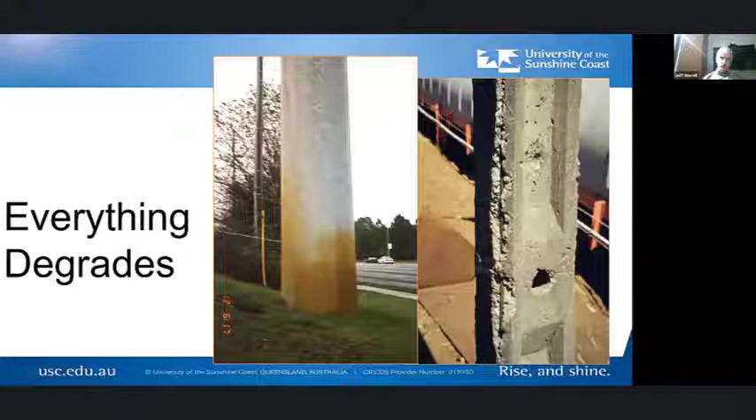Our partners at the center, first off, Forest and Wood Products Australia is our funding body. They've decided this is a valuable exercise for the country, and they've invested heavily in our center. Our other two partners are the University of Queensland and the Queensland Department of Ag and Fisheries. So there are two primary partners. We have a number of other research partners we're working with. University of Tasmania in Launceston and then University of South Australia at Mount Gambier are two of the other groups we're working with. And we really are looking to reach across the country to work with lots of groups because we have capacity here in durability, but lots of other people have other skills that we can marry in and take advantage of. So we are looking to reach out to others.

So our center has a number of objectives, but I'm only going to talk about a few of them here. One is that we need to develop... there's lots of materials coming along, lots of new, exciting wood-based materials, composites, modified woods, all kinds of things that are coming into the country.

And while they've been looked at elsewhere, they aren't necessarily fit for purpose for Australia. And one of the things we want to confirm is that these materials will perform as expected here. So we're trying to develop data on emerging wood-based materials.

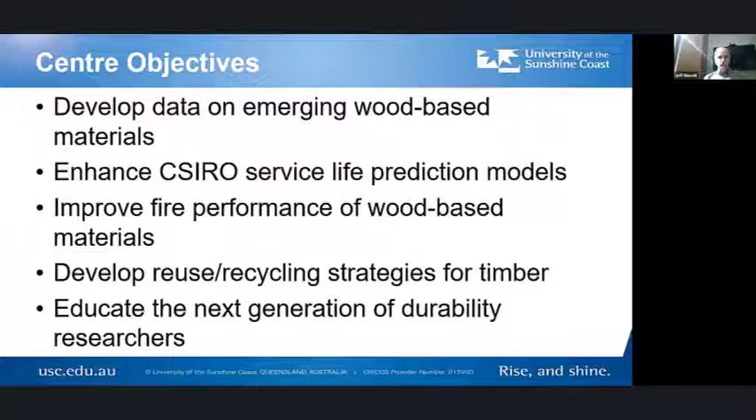We are also looking at the circular economy and reuse recycling strategies for timber. That's going to be increasingly important, not only for timber, but for everything. But underlying all that is to educate the next generation of durability researchers so that we don't have this loss of capacity in the country. So that's one of our underlying assets, is develop people who understand timber and understand durability. So we're doing a number of smaller projects that all fit in under this.

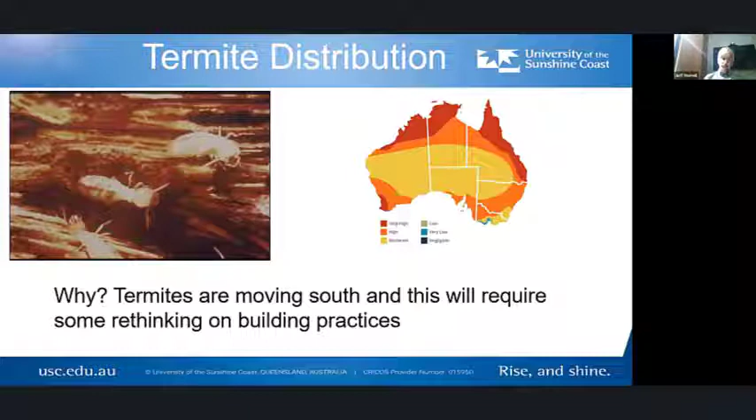We're seeing changes in distribution of termites. Many are moving further south as a result of climate change, and we expect to see changes in how we need to build for some of the termite species. So we're working with a group in Victoria that has an app which the pesties can use to report termite distribution, and we're working with them to reassemble a better map that's probably a little more refined than what you see on this fairly broad scale. When we get that out, that's probably going to require some rethinking on building practices across the country, but particularly further south, say in Victoria.

At the same time, we're also asking, okay, what new materials are coming? What do we need to know about them? Will they perform as expected? There are a lot of materials coming in from offshore, things like acetylated wood, thermally modified timbers, newer composite materials. And there are lots of claims about how they perform. Many of them come from Europe, where there are not termite hazards and where they do not have tropical and subtropical exposures. So we need to make sure that they are really going to perform under the expectations here. So we need performance data for Australia.

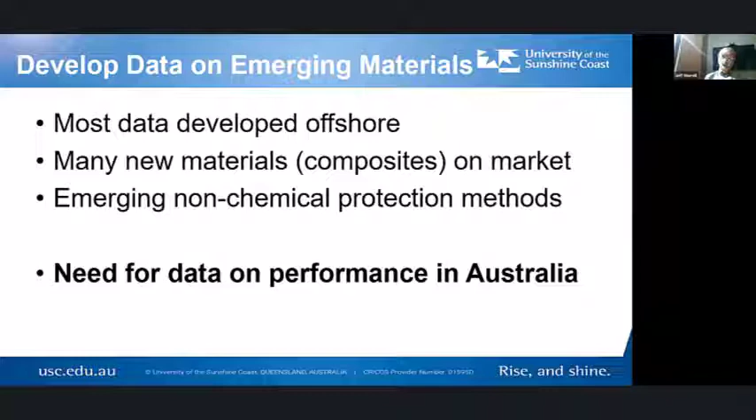And we have been working on an exceedingly large scale test. There's about 8,000 pieces of timber in it, to look at some of these newer materials and newer chemistries where there are not public data, and to try and develop the data to show whether they will perform as expected or not. This is in cooperation with our DAF partners, the Queensland folks. This is just examples of some of the tests we have going.

We have sites in Maroochy, north of Brisbane, and then way up in far north Queensland in Innisfail, where the conditions are quite extreme. And the goal here really is to develop the data that shows whether these things perform, so that when somebody walks into an architect or an engineer's office and says, I have the greatest thing since sliced bread, they have data to really decide whether that's true or not. So that's a big part of the test here.

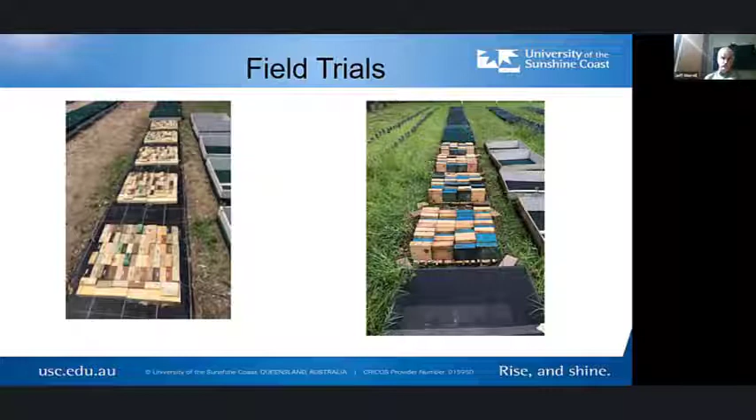At the same time, this test is going to inform a lot of the predictions that people are making about performance of treated timber. So it's got a dual purpose, and there's some other basic research we're doing around it, like what organisms are attacking the wood, where do they attack differently in different places. So there's a lot of other more basic scientific work that's involving a number of postgraduate students.

One of the troubles with doing tests like this is the center is operating on a 5-year cycle. Decay doesn't really operate on a cycle. It operates on its own time frame. So this is a relatively slow process, so it's going to take time. But why is it important? Well, it's going to help people decide what materials are appropriate, and hopefully in the end reduce wood losses, so that we wind up with materials that perform as expected or better, and help people to use the resource more effectively. And we want to do that with all materials, but particularly with timber.

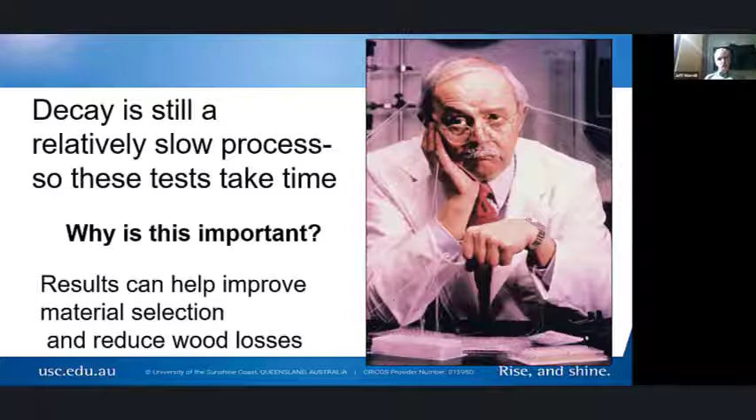Those data will feed into the service life prediction models. And let me give you some background about why that's important. Lots of engineering materials claim service life values, 50, 60, 1,000 years, doesn't matter what you say. But there were a series of models developed by the CSIRO in the late 1990s, early 2000s, to predict the performance of timber in different applications. And they were quite world leading.

In fact, Dr. Bob Leicester from CSIRO won the Wallenberg Prize, which is sort of like the Nobel Prize of timber, for the fact that it was so world leading. Well, it's been a long time since those models were developed, and admittedly, at the start, the models were thin on data. And one of the things we're trying to use the field trials for is to help produce some of these data that will help improve the models.

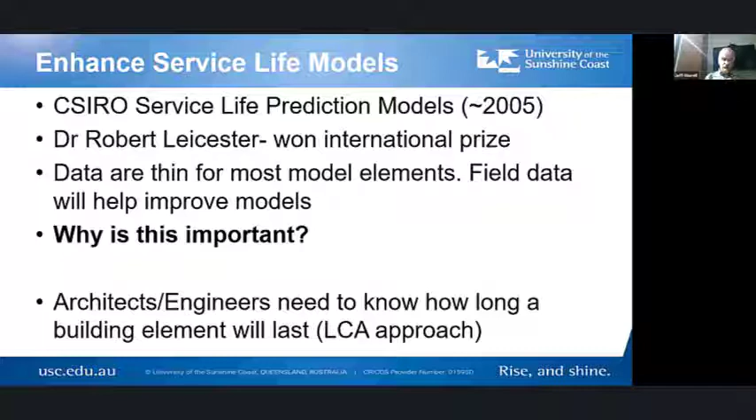If we can do that, these models become a lot more useful in predicting where you should use timber most appropriately. And if we do it right, then people have a better feel for what to expect of the different materials that are out there. So it has a short-term implication for, okay, here's how these materials that are coming on the marketplace will perform. In the long term, it says, all right, if you use this, you can expect 25, 50, however many years for this given material. And that's one of our big goals, is to give people a little more certainty around timber.

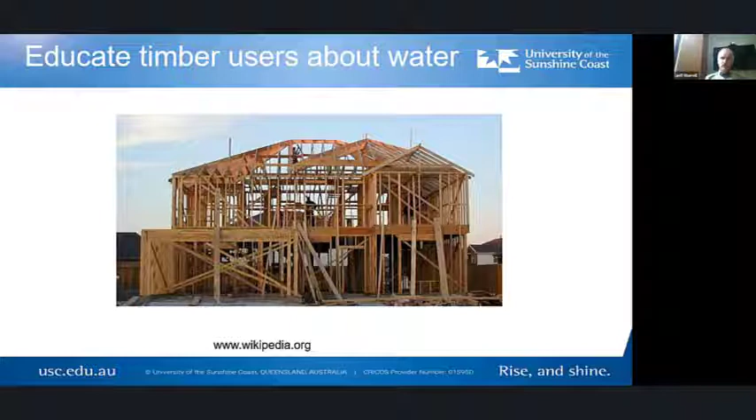One of the things we're keenly interested in is what's going to happen when you get wet on a structure like this. Mass timber has come along, so here we have cross-laminated timber that's used in the 25 King Street building, but there's also lots of other products, mass plywood, gang nailed, laminated timbers. There's all kinds of materials that are larger timbers that will also wet on site. And one of the things we're keenly interested in and are working with our DAF partners on is, how do you manage that? How much water gets in? What are the implications of that water? And this work is just ongoing. So we're hoping to come out, in probably the next year or so, with sort of recommendations.

A lot of companies are already dealing with this. They're going to just-in-time delivery on site, covering materials and putting water barriers on beams as they're being put in, because they recognize the risk of these materials getting wet. They wet just as quickly, but they don't dry as quickly. And that will become really important for making sure these products perform as expected.

And so that's one of the bigger things we're looking at, moisture behavior in timber, because while it is not directly durability related, it will eventually lead to durability issues. And so we want to make sure that these buildings are built properly and that they become shining examples of how to design and build with timber, not examples of what you shouldn't do. And our DAF partners are heavily involved with that.

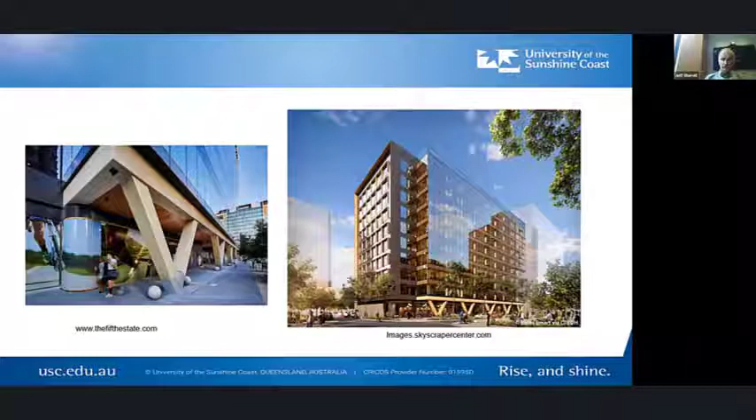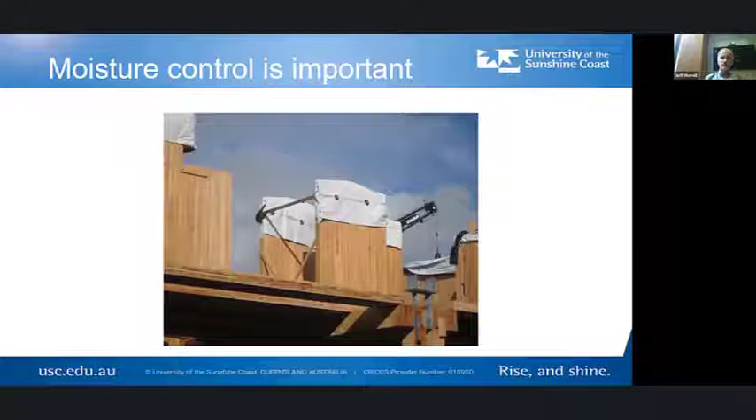We're also very interested in the circular economy. Timber is an amazing material, right? It's renewable. We can grow more trees. When you're done with it, if you let it just decay, it will go back into the atmosphere and other new trees can capture it. So it's got a circularity to begin with. It has low energy for processing. It is all the things you might want of a natural material.

Unfortunately, at the end of life, it has some issues because it's fairly bulky. Australia is a big spread out place, and so things have to move long distances, and that can make disposal difficult in some applications. Particularly where we're concentrating right now is on engineered wood products and preservative treated timbers, because they pose some long-term concerns for how to deal with the materials. On the other hand, there are some really good options for how to get rid of that material, or not get rid of it, but repurpose it.

And so we're working with a number of users of treated timber and engineered wood products, as well as some of the producers, to identify what volumes are out there, where they are, how you could effectively move them. Because if you've got a timber that's 1,000 kilometers from where it might be repurposed, it's probably not going to be very effective for reuse. And then try to identify the best options for moving and repurposing the materials so that we don't just use timber once, but we use it once, twice, maybe 3 times before we do something with it.

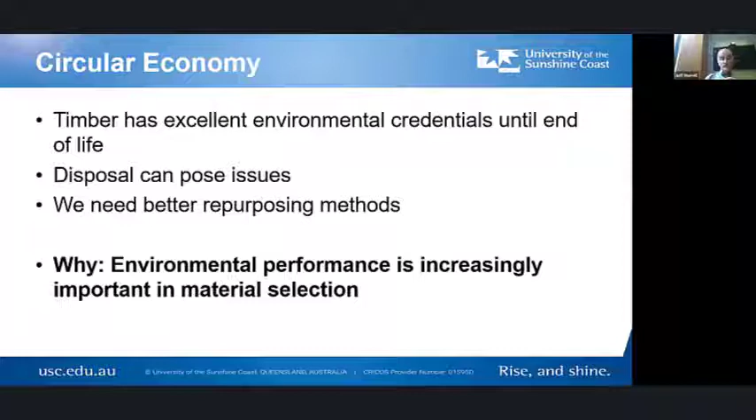We also have an element of our partnership in fire performance. Now, fire in the Australian context is not often looked at as durability, but bushfire risks are increasing because we've tended to encroach on the interface with the rural areas, and we've tended to have more extreme cycles. So we're likely to see bushfire risk change over time. And there's a lot of work going on for how to understand that, how to manage it with designs and structures. But there's also a place for understanding how to use timber in bushfire prone areas.

Timber is actually not a bad material in a fire. A small diameter timber may have issues, but if you look at bigger timbers, I would much prefer to be in a large timber structure than in a steel structure. And the reason isn't because one is stronger than the other, because we design them the same way.

But it's really because when timber burns, it burns at a known rate based on the density and the intensity of the fire, and it will fail slowly. When steel burns or heats up, it will fail catastrophically because once it becomes ductile, it collapses. So timber is not a bad thing to have. We just have to understand how to use it.

We have 7 species of timber in Australia that have BAL 29 ratings, which means they can be used in bushfire prone areas. One of the things we want to try and do is to develop data on other species. And our partners at the University of Queensland have excellent facilities for doing this. Dr. Felix Wiesner is our partner there. And we're trying to develop data on more species so that there's a broader range of materials that can be used in bushfire prone areas.

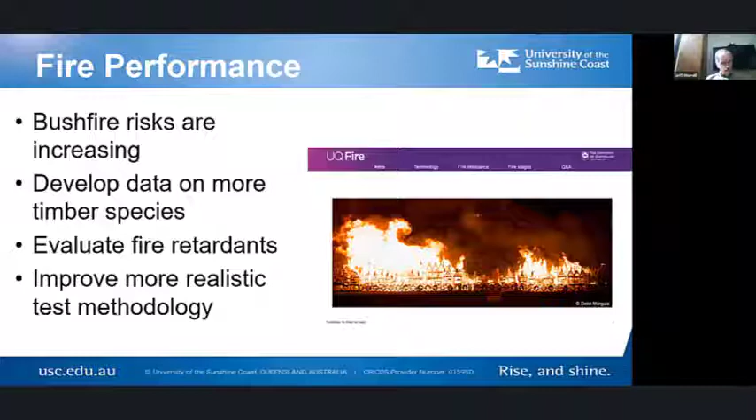The final thing we're working on, and I'll sort of cease there, is the next generation. The center was initiated in part because there was very little research going on. It was also initiated because most of the people who had worked in this field were aging out and needed to be replaced or enhanced. And so part of the center's mission is to educate postgraduate students. And we have now 11 postgraduate students engaged in different elements of our center partners at UQ and at USC.

We're also working with our partners at UTAS who have a number of students down there. The goal being to kind of get a cadre of people out there who understand timber, but also understand the role of durability in making sure that we have products that last 50, 60, 100 years. And I think if we do that, we enhance the reputation of timber, but we also do good for the planet. So I think we kind of have a dual purpose here.

I started to go off before, and I didn't at the start. I know we acknowledge the traditional owners, and we didn't do it for Brisbane. And so where I sit in Brisbane, we acknowledge the Turrbal, the Jagera, and the Yagara people who were the traditional owners of the land. And we do pay our respects, past, present, and future to the people who are here. I think it's particularly important when we deal with a resource like timber to understand that people came before us and managed the land and used it.